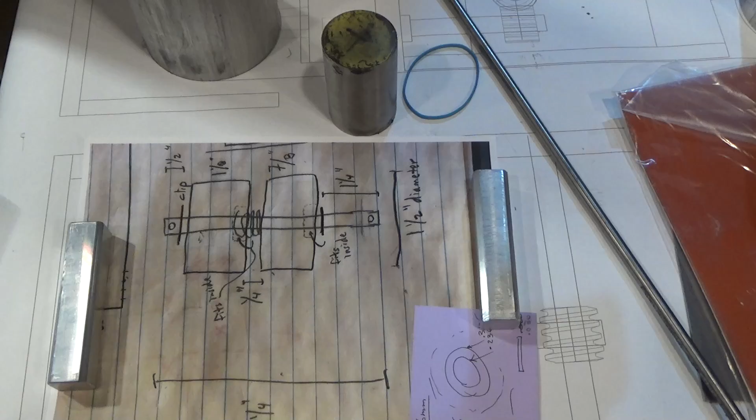So I got another project from my brother-in-law. This one is a fishing lure designed to catch halibut. He founded a company in Alaska.

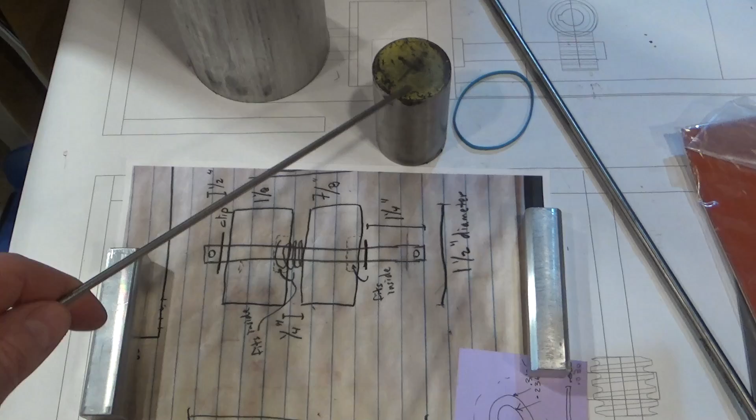It's called the HaliBut Cracker. It involves two pieces of stainless steel and a stainless steel shaft with some E-clips to hold them in place and a spring in between. I'm going to use this material I've got here, which is 304 stainless, 18/8. Not ideal for salt water, but I couldn't get any 316 locally in short lengths, and it's very expensive. So we're going to see how the 304 survives the salt water.

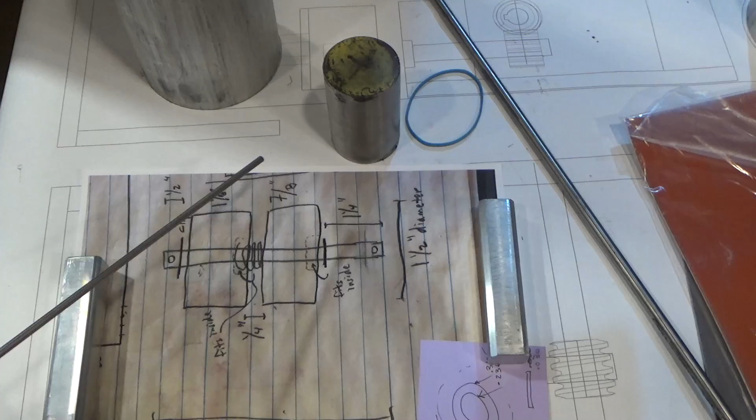Also it's the short end, which was scrap. It's too large in diameter, so I've got to turn it down, and I need about 2 inches of the 3 inches. So that presents a problem, and I have a solution for that.

What I'm going to do is face this, then thread one side, thread an arbor, screw it onto the arbor, and then turn it that way. So we'll get started with that first.

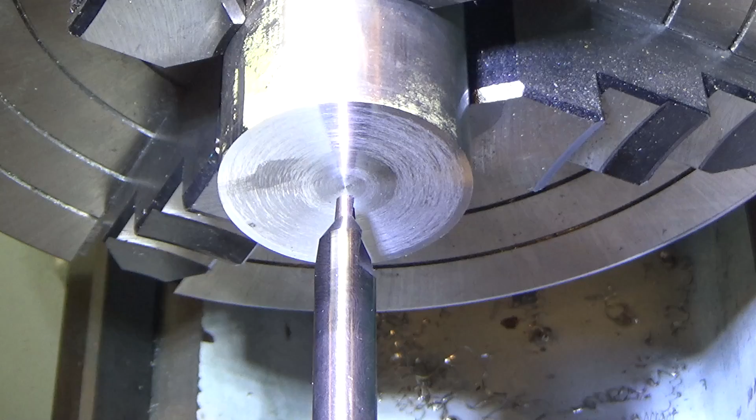I zeroed my DRO. We're going to go in 550 thousandths.

My tap chart has soft metal and hard metal sizes for tap drills. So I chose one in between because I think this stainless is somewhere towards the hard side, but not fully hard. So I'm going right in the middle.

Just tapping for 1/2 inch 13. I've switched to a bottoming tap to get as many threads as possible. I only went in about 1/2 inch because I'm trying to minimize material waste, so I just want to get as many threads as I possibly can.

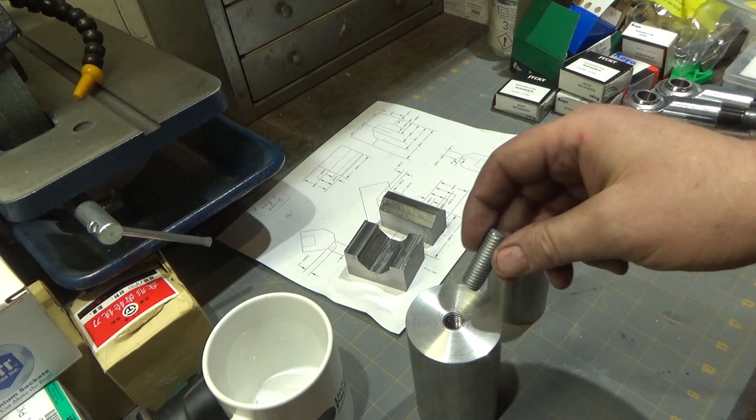So what I did was cut out a piece of all-thread, and this is the stock I need to use the most of. I'm going to run the thread in all the way to the bottom on that one, and then tighten it up on this one.

I left these edges really flat so they're sharp. Now I'm going to load this up in the chuck and turn it. You may wonder, do you have to worry about it loosening? But fortunately, when you're turning in a normal direction this way, the cutter forces this to tighten on the arbor, so we should be good to go.

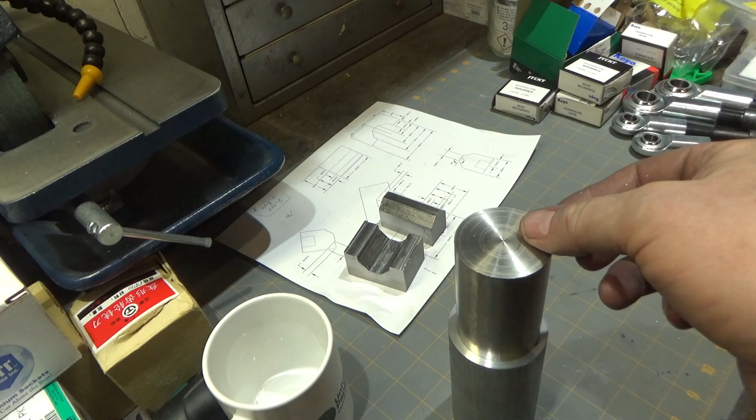Let's turn this down to the 1.5 inch nominal diameter I need and make my couple pieces. Before we remove material, because there's so much stick out here, we're going to pre-drill this for a little bit over 5/16.

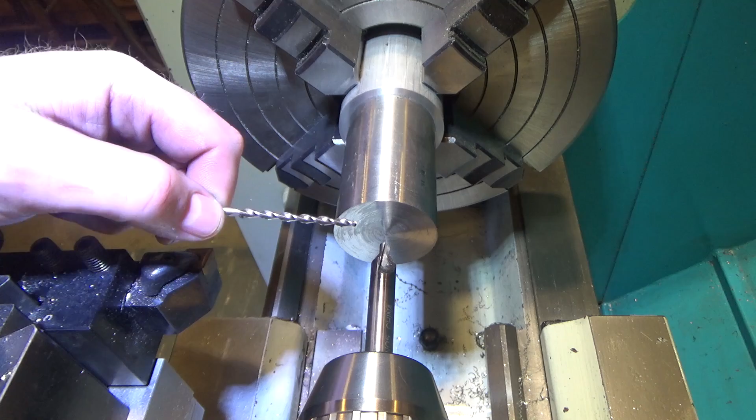Actually, I think we're just going to go for 5/16 right now, which is the rod that's going to go down the center of the two pieces. We're going to drill all the way down 2.5 inches. Then we're going to stick the center in the end here to help support this before we reduce this diameter down, because it's over 300 and something thousandths.

So we're going to start with the center drill, then drill with something like a 3/16, and work up to the 5/16 and test the rod to see how much slop we have. We want a fair amount of slop on this, so we're going to play it by ear and see how it feels.

The drill bit we were using was a DeWalt cheapo. We weren't getting symmetrical chips out of both flutes, so I swapped to a cobalt bit that I had that was better.

So the lure itself needs a fair amount of slop because they're counting on the noise of the stainless steel bits moving on the shaft to attract fish. So we overcut it by a full 32nd, and that's the slop we get, which is what we want. We're going to have two 1-inch pieces that slap around on here.

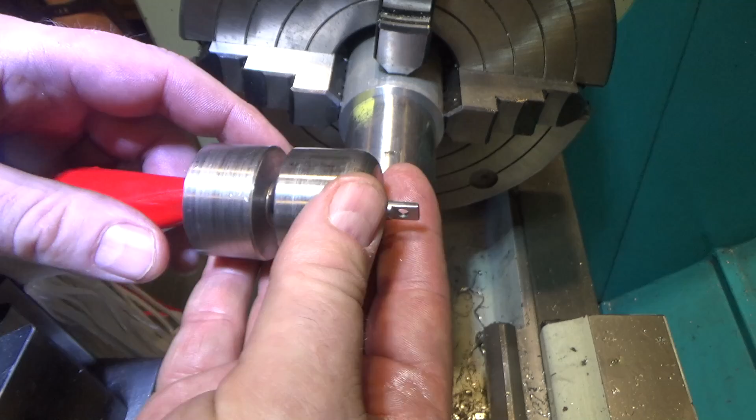Here is the original right here, and you can see there is a huge amount of play, because they're counting on the noise of this to attract the fish. So we're trying to duplicate this.

Next stage, we've got to take this down from 1 7/8, or 1.875 inches, down to about 1.5 inches. Again, the dimension's not critical, we just want it about 1.5 inches. Obviously, they chose the size probably based on availability more than what the fish's mouth size is, but that's what we're going for.

So I've got the feed rate pretty high, currently at 14 thousandths a revolution. What we're going to be doing is taking a 25 thousandths bite at a really high feed rate. Here's the first one, we're going to see if we can do this without lube, see what happens. 440 RPM right now.

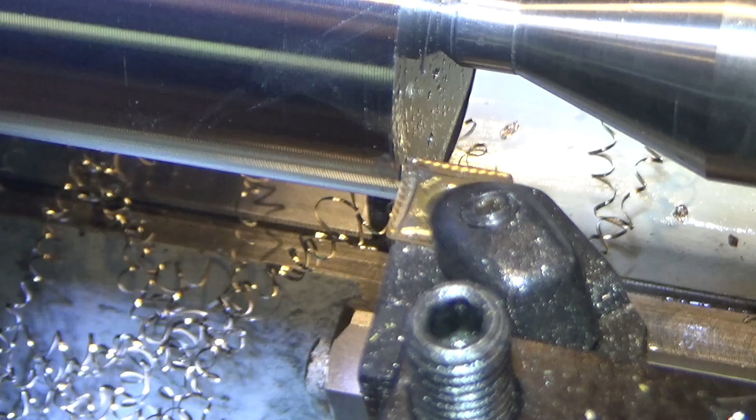This is going to be quite a few passes. Here's another perspective, also almost 15 thousandths a revolution. Chip breaker is still not engaging. Maybe next pass we'll shoot for 35 thousandths depth of cut and see how that works out. Alright, it's 35 thousandths depth of cut, closer shot. Still no chip breaker properly engaged.

Alright, let's try 40 thousandths. Or let's go for a higher feed rate still, something higher than I've ever done before. So we've decreased our cut back down to 30 thousandths, and our feed rate has gone from 14 thousandths a revolution to 22 thousandths a revolution. Let's see how it does.

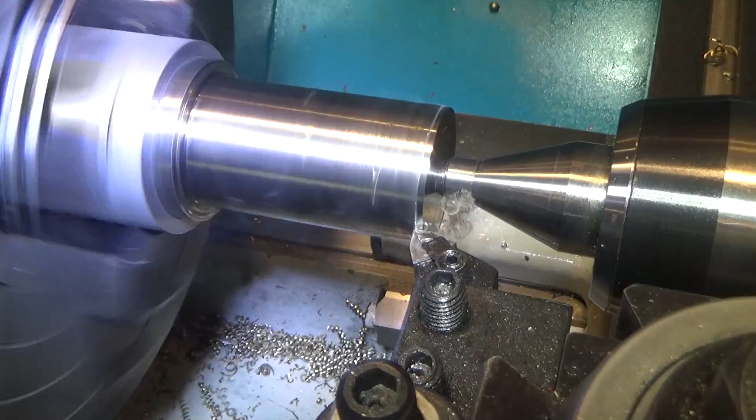Last pass, 5 thousandths, 2.2 thousandths per revolution. In case you forgot, this is 304 stainless.

I'm going to round over this far side here. I've got a 1/4 inch round over bit, we'll use some lube. Problem is, it's tight in here, getting some chips stuck.

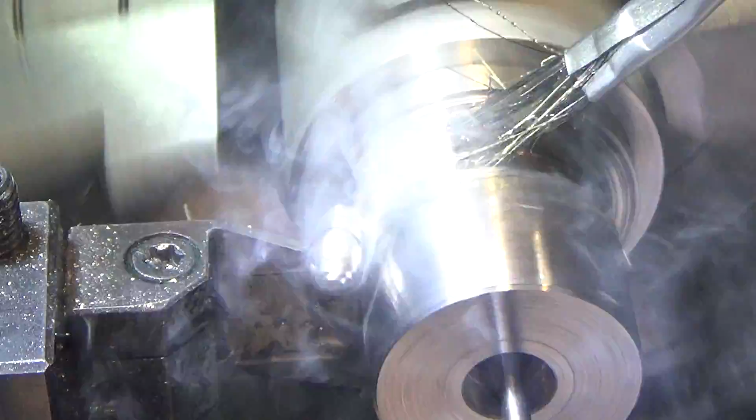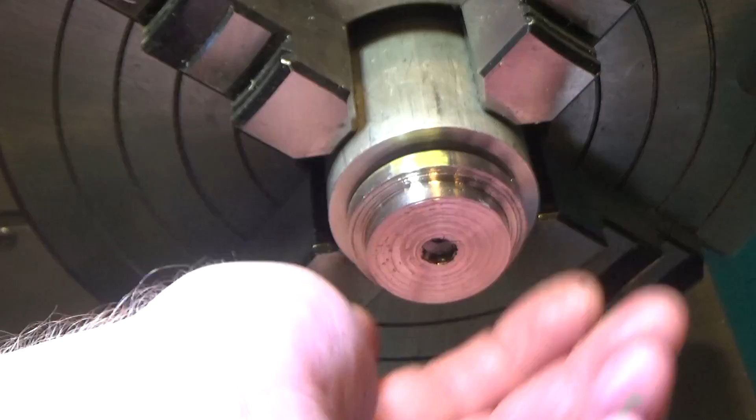So here's what's left over of that piece of stainless, and we just unscrew it. If you want, toss it in the trash. That's it, so we were able to utilize a lot more. If I only had this much in the jaw, I never would have been able to hold it safely. So that was my trick.

So I'm just going to take a really light facing cut now and just clean up the face. Then I'm going to chamfer, and then I'm going to put in the half-inch relief.

Got the RPMs up to 680, and we're really taking a very light cut, just cleaning it up.

All right, now we can chamfer the outside edge. This is razor sharp. And we can relieve the center.

Second part finishing. First I'm going to take a little facing cut after I get it out of neutral. I had to dial in the four-jaw, so I put it in neutral to do that. Second part, quick facing - I'm going to chamfer the corners, relieve the center.

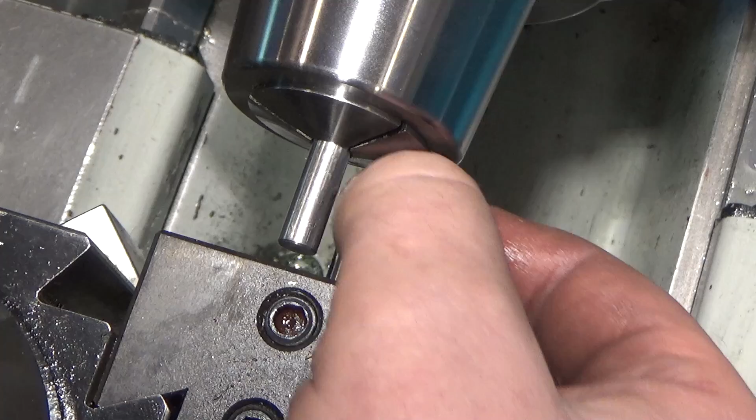I've got a Micro 100 carbide bar for grooving. Fantastic finish on this thing. I bought it off of eBay - someone was selling it, great deal, brand new.

So we got to go backwards because I'm on the rear side of this guy. And let's just cut this - we got to go 93 thousandths.

I mentioned it's cutting like butter, even the stainless.

We had to switch to a different setup to groove the other side. This time the lathe will go in the normal direction.

Looks like with this one, might need a little lube.

So here we're going to machine flats into either side, on both sides of this, and then drill a hole down the center for the ring clip.

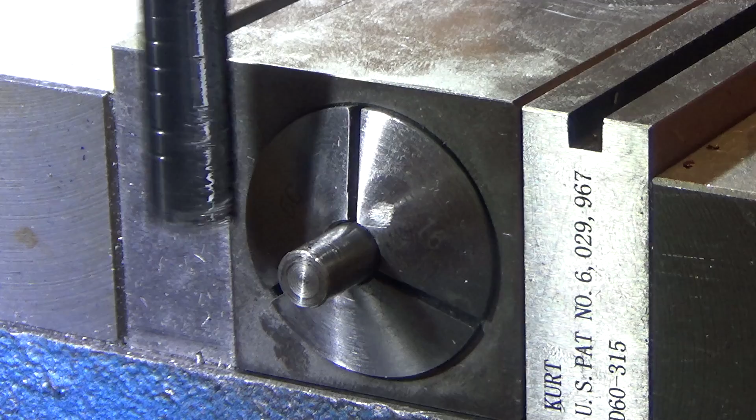Let me just loosen this guy. I don't know if you can see that, but we just loosen this guy, flip it over 180, pop it back into the stop I left. Rinse and repeat, and I did set my x-axis to zero so I can come back to the exact same spot again.

Alright, so here for the final assembly, you got to purchase one of these silicone squid skirt deals. And this is the top part that's a swivel, with 2 split rings on either side. So here's the assembly order.

Actually, we've got to put the split ring on the bottom with the hook. Then this thing slides over that whole bit. Then you put an E-clip on, and then the 2 center pieces with the spring inside, another E-clip, another split ring, and the swivel. The split rings are really heavy duty, so I'm going to try and do this off camera. I'll bring you right back after we got it assembled.

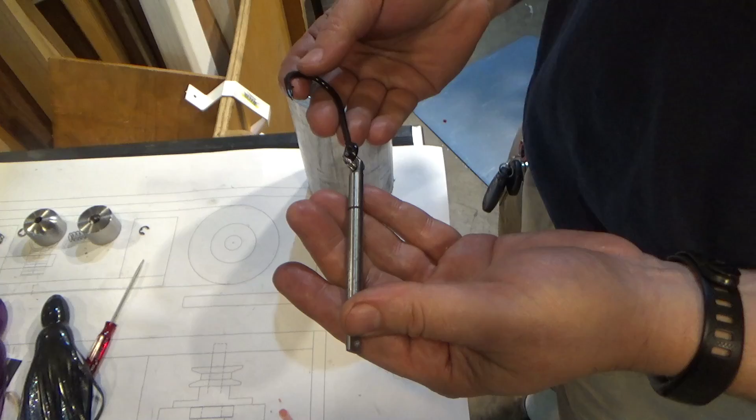So here's the first step. We got the hook and the circlip on the split ring clip, and it took 2 of us to do this. It's so heavy duty, you'd have a hard press to do it by yourself.

So next goes on the squid bit. We'll put that on, bring you back.

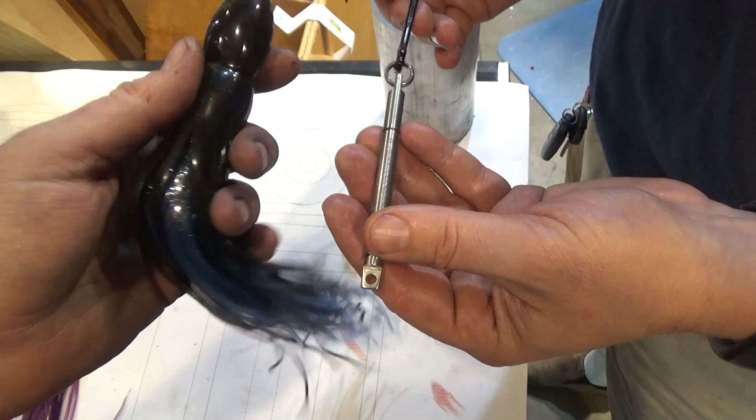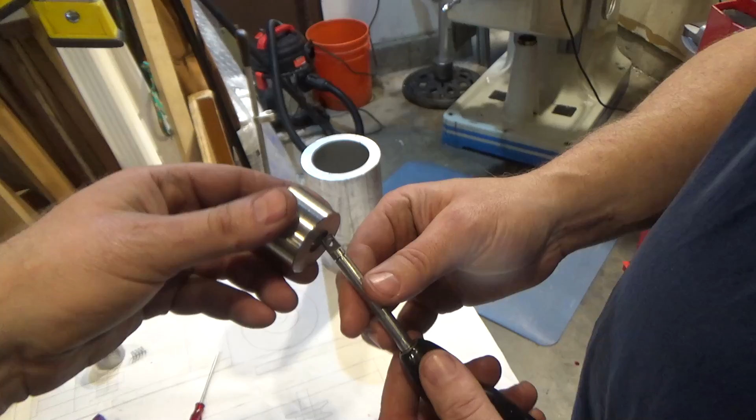So this squid draping thing is actually 2 parts. So the internal part we zip tied in place just under where the E-clip goes, then slid the top one down over it. Now we put on the back piece and the spring that we cut based on tension, and the top piece.

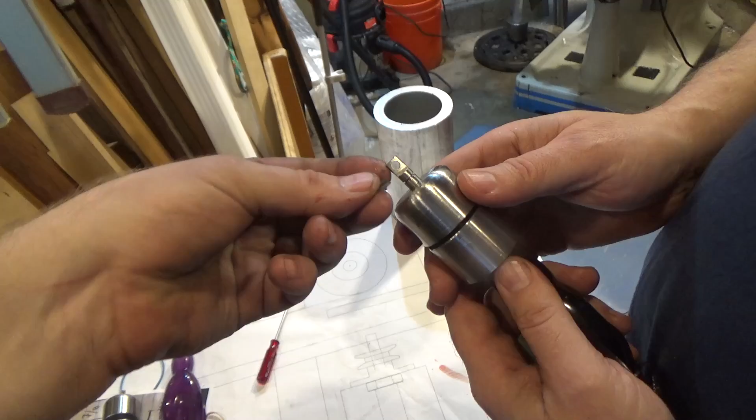There are tools for putting on these E-clips, but now we're going to put the last ring on the swivel. We'll do that off camera again because it takes 2 people.

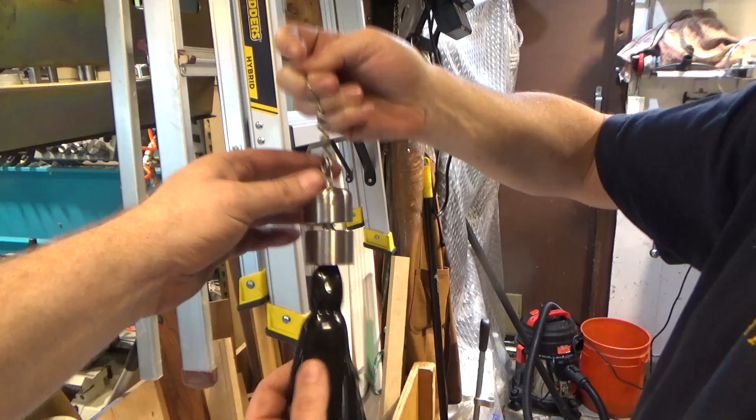So here's the whole lure together. It's to catch halibut, and it's designed to make a lot of noise that attracts the fish. Again, we put this over the hook because we kept finding the sharp point.